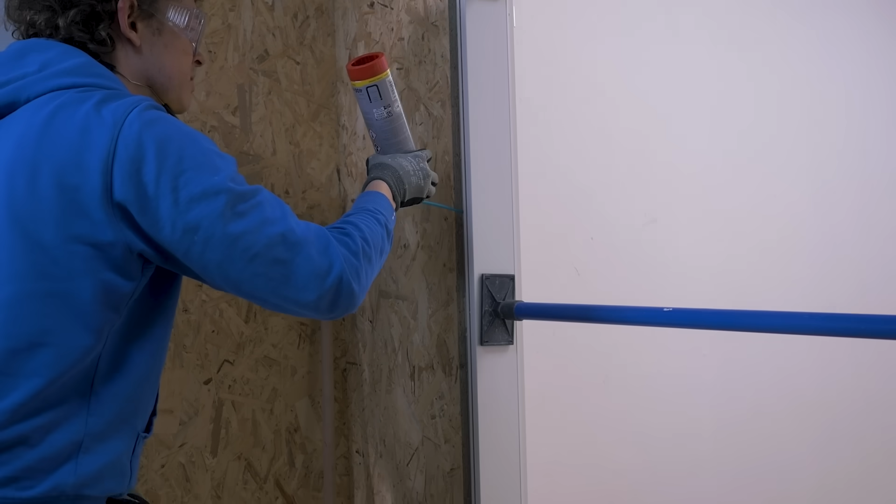New workshop renovation part 13. Last time we went into a bit of detail about installing Stefan's and Robin's door, improved our insulation cutting, and finished up the last walls, and then Robin's shop.

And with most of the heavy work now done, it's time for, as you can see from where I'm recording, lighting installation in the new workshop. Very important topic for me, since I'm not only working in here, I'm recording video in here. And I have additional requirements. I want it evenly bright everywhere and the same light temperature.

So what I'm going to be using are light panels, 21 of them. And I had an interesting idea for mounting them, kind of invisibly. I didn't quite like the way Stefan and Robin did it. They mounted them with a 3D printed clip in each corner, which means 4 well-aligned holes per panel, and you can't really adjust anything afterwards. Since I installed 21 panels, I didn't want to drill that many holes into the ceiling.

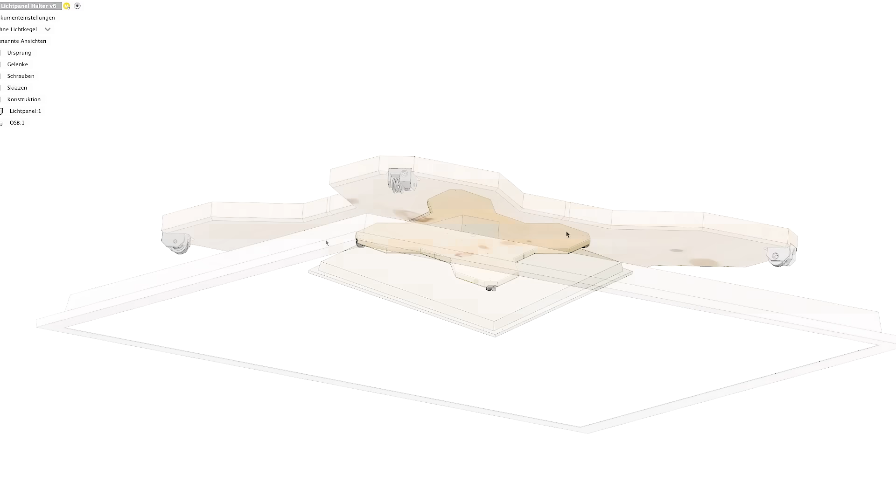So here's the design I came up with, and you can safely say it escalated. The idea basically was to have a backing plate behind every panel that houses all the components so they're organized and hidden away. That being the power supply and a little power distribution box. And then to hang the panel from the backing plate, I would have 4 pieces of rope attaching to each corner of the panel, which are adjustable in length, so I can adjust the height of the panel precisely.

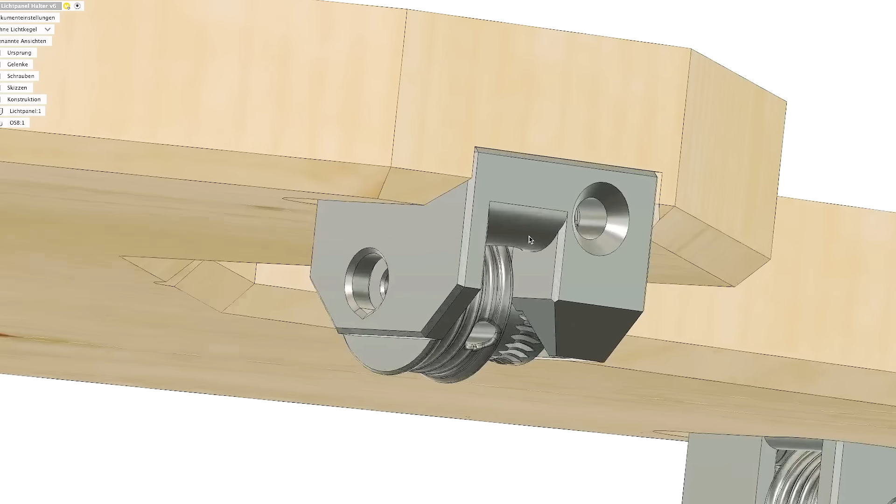And then I thought, why not make this rope attachment a 3D printed winch? Yeah. That's the design. What a stupid idea to make this 21 times, but without executing it, you never know if an idea is stupid, so let's get to work.

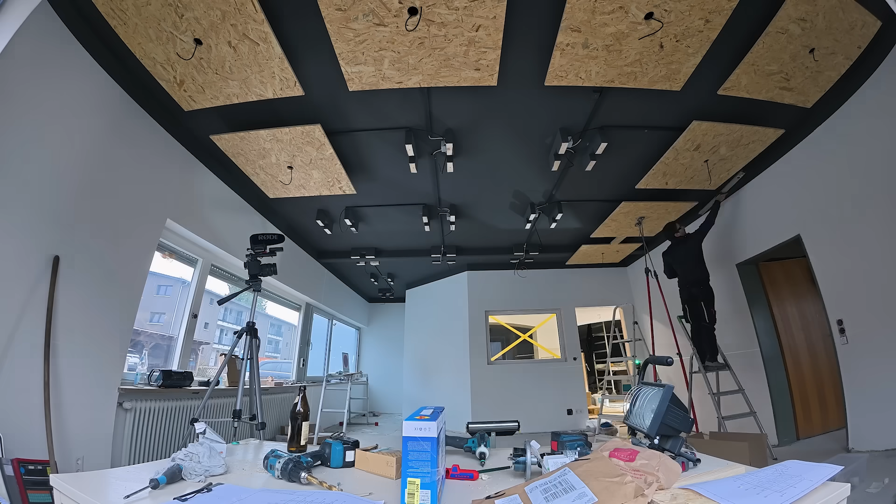The material for the OSB panels are actually offcuts from the office ceiling panels. I brought them all into the shop and cut them into roughly oversized squares. So many squares. Then at the CNC router, I only needed to position them roughly.

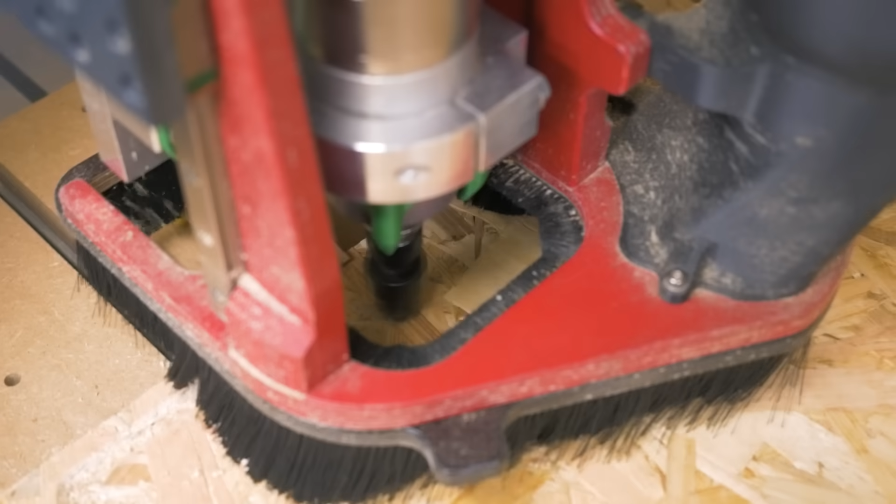The first pass is the chamfering, which will make sense in a minute, and spotting the holes for the power supply and breakout box. Tool change to cut the outer shape, and the little pockets for the winches.

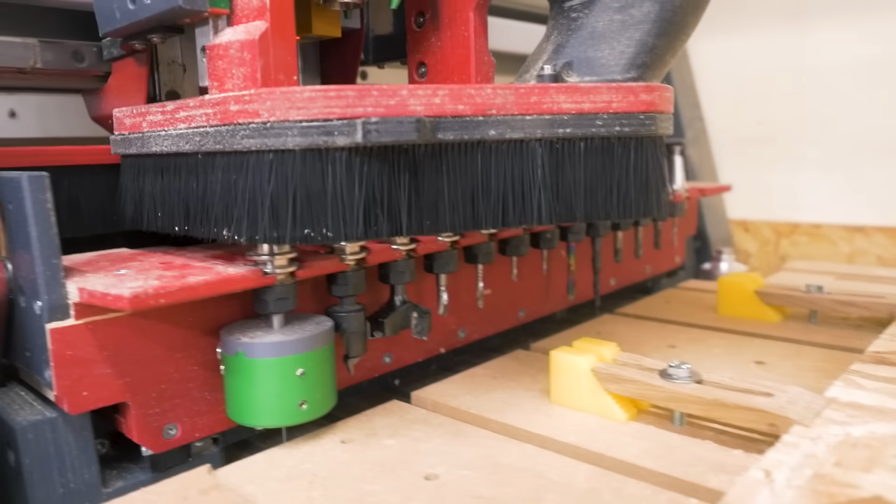Having the chamfer made first meant there's no tear out when cutting the outer shape, because all the little wood fibers are well supported. Once done, I could hammer off the waste and flush trim everything with this chamfer bit. And now, repeat.

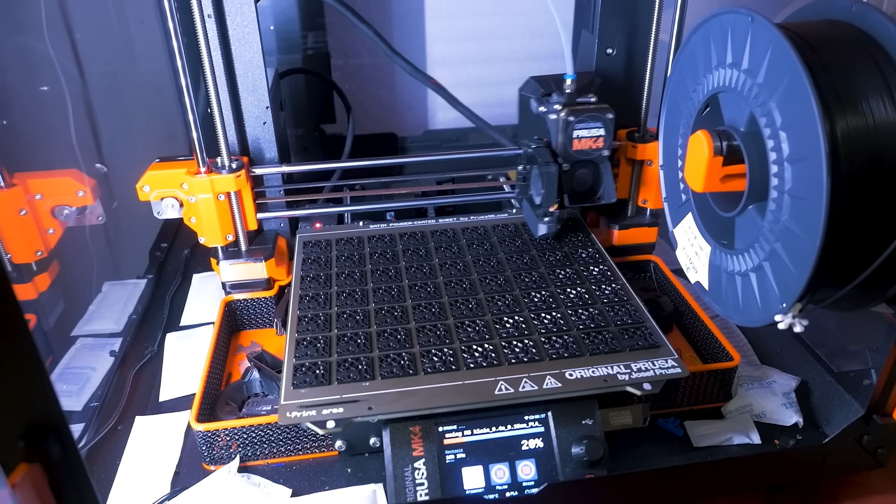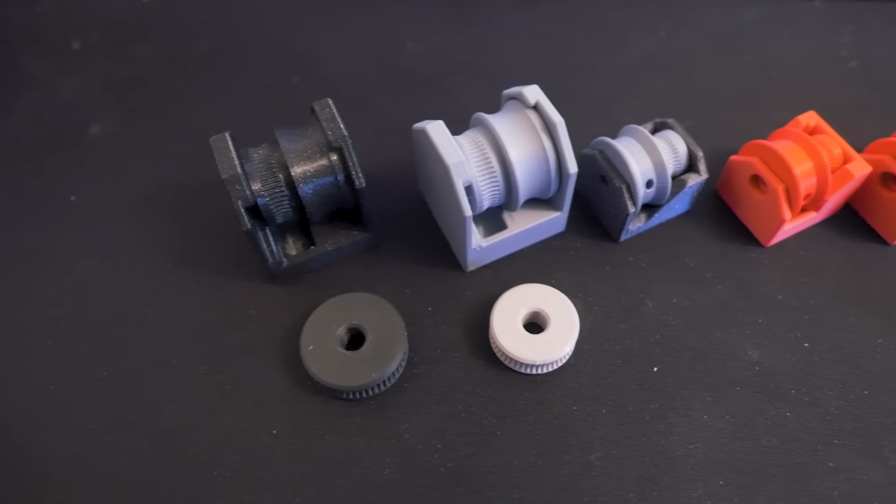In the meantime, the 3D printer was busy printing all the winches. But the final design took a few iterations to work every time and be easy to assemble. When you have to do it almost 100 times, every detail becomes important. Time for assembly.

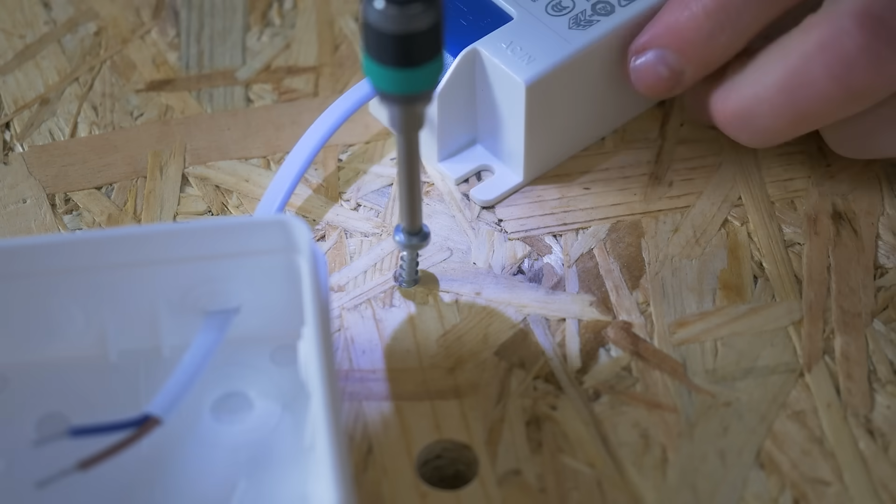Mounting the winch bodies. Then the breaker box and power supply. 21 times, of course.

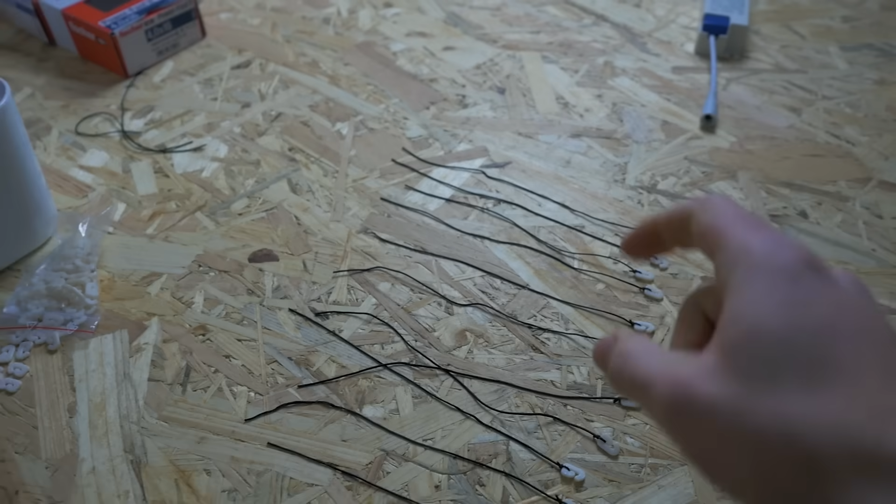Now for actually hanging the lights, I'm using a nylon rope with a little 3D printed hook. From the spool I can tie a simple knot, put a hook in the loop and pull it tight. This way the knot will pull itself tight under tension.

And then cut it with an electric lighter. This will seal the ends at the same time. Here again from my point of view in real time.

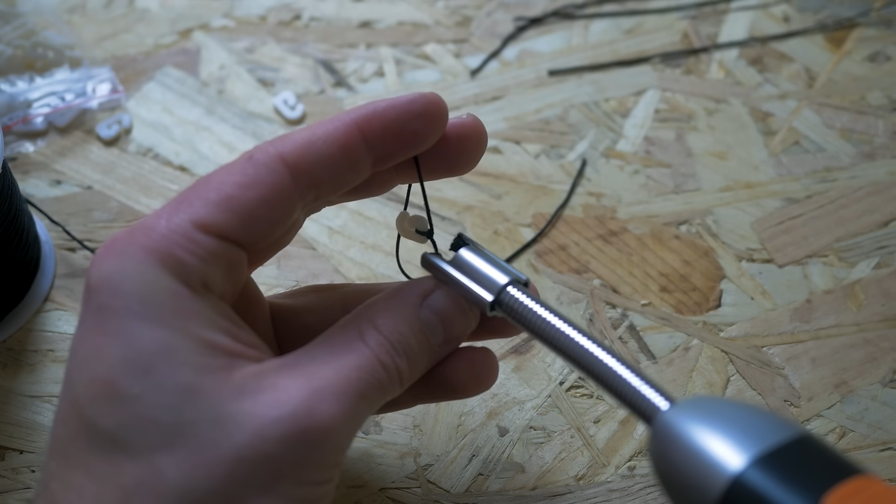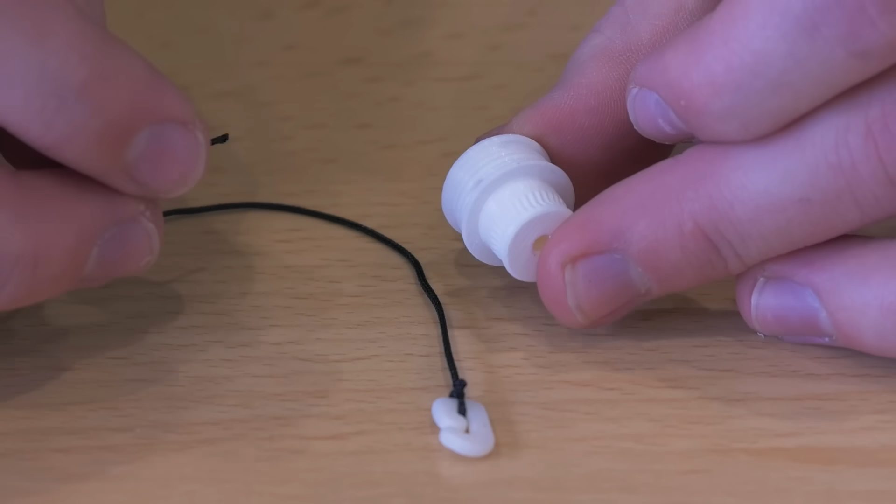So many hooks. Two screws in the table was a great jig for cutting to equal length. Now you can grab a spool and thread the cord through the little hole. Tie a knot at the end. And it's secure.

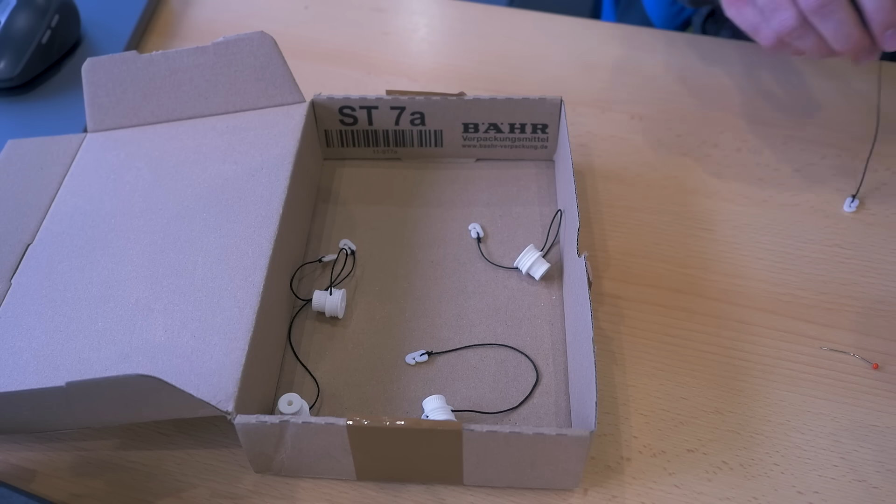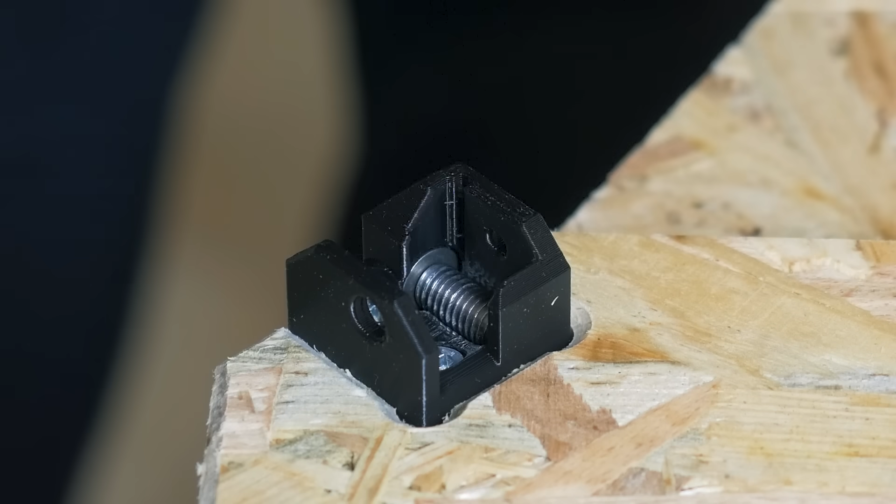Throwing them in a box was a fatal mistake, but future me will find out soon. In now go a washer and set screw with grease. Then the pulley and a little bolt where the bolt head is used as the axis on this end. It was going well for a while, but eventually all remaining pulleys tangled up into a big knot, which was great fun to take apart again.

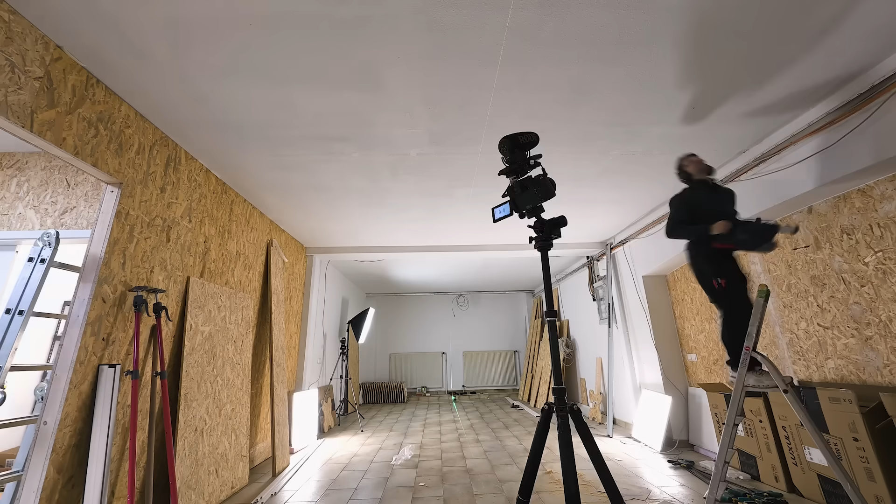Alright, next I need to mark the layout on the ceiling, and for that I made a drawing with all the dimensions. Everything uses this corner as reference, so I set up a crossline laser equidistant to the wall and marked the hole positions with a distance laser. And I had a great setup for some offset from the ceiling. I then only needed to drill one center hole for each panel. And with the oversized hole in the OSB, I had some front to back and rotation adjustability.

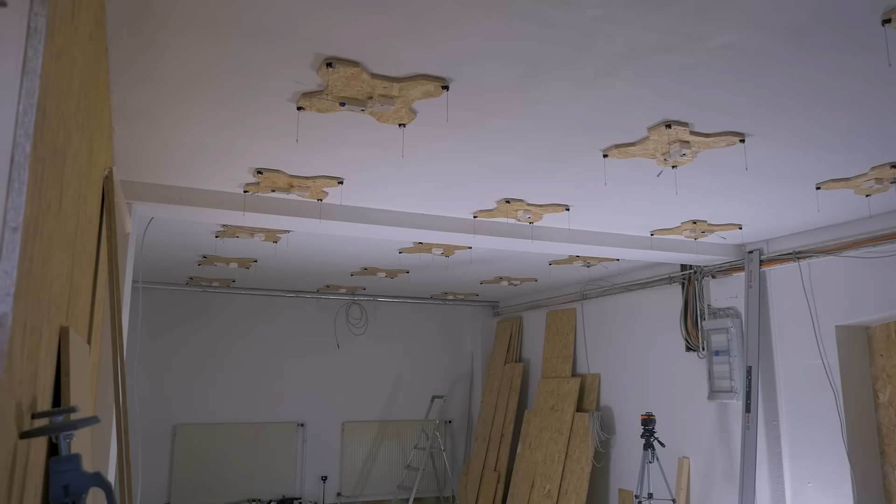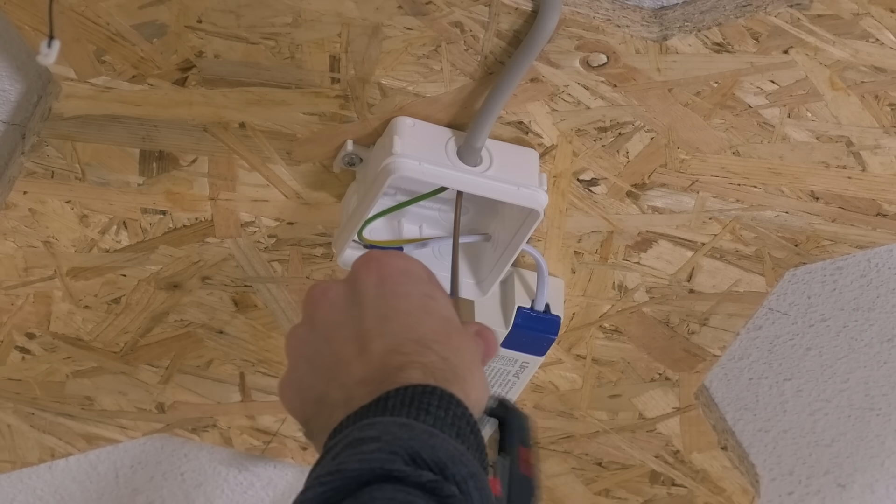That's done, now come cable channels for wiring. That was straightforward, as well as the wiring itself. It just took way longer than anticipated. In the non-branching panels, I could use these type of Wago clips, and in the branching ones, the quintuple ones.

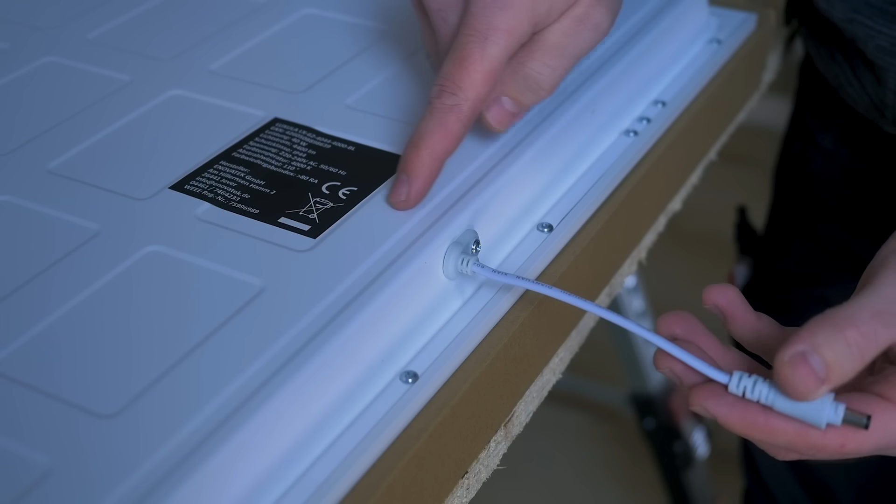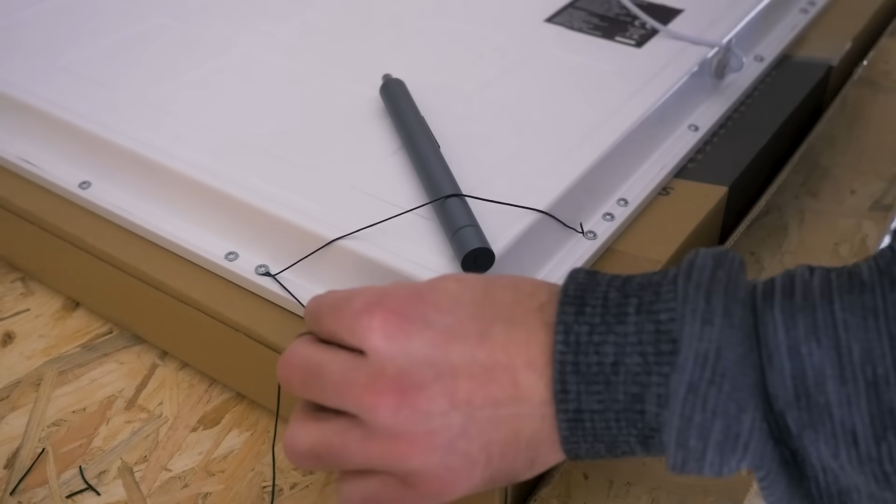Now the panels. Now the cables come out the side of the panel, but I need them to go up like this. So I 3D printed a little clip that hooks on here. Cable in here. Done. Unfortunately, the panels don't have an obvious mounting option, so mounting some more of the nylon cord. And these screws are perfect for that. Something in between, so there's still a little bit of slack. That looks good. And then cutting it off.

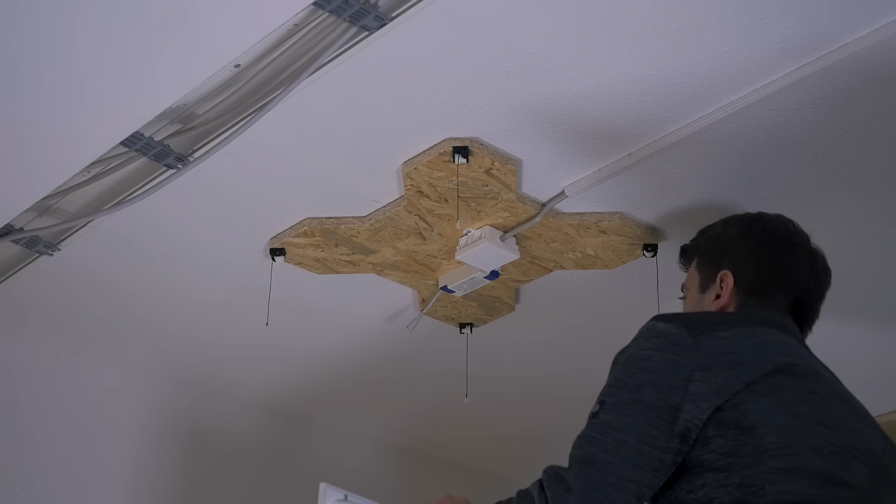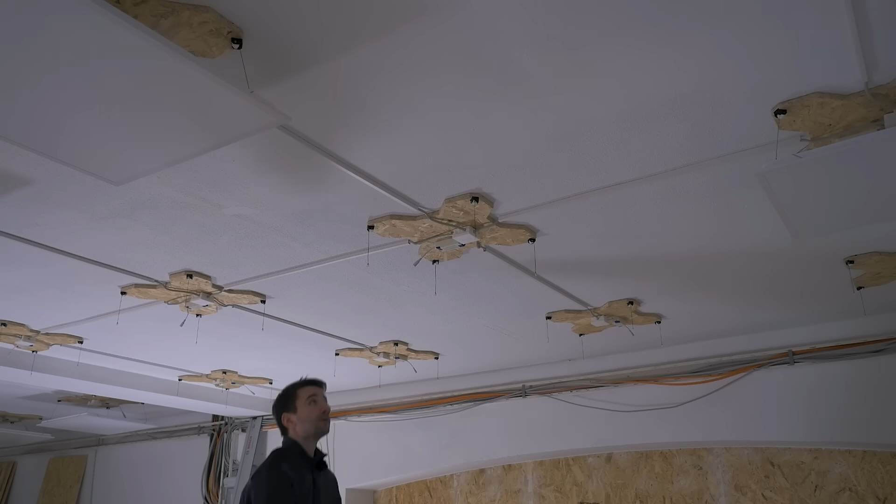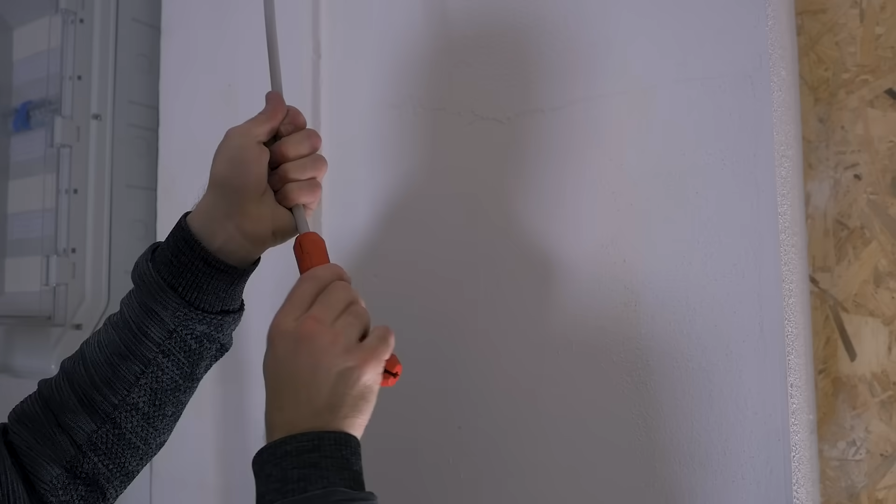Then up at the ceiling, just hook in the first two, plug in the cord, and hook in the other two. Done. Alright, now all panels are up, except the two with the light switch cable, and that's the last step before turning them on. Since it was already hooked up to the RCD, I couldn't just cut it, but had to splice it open and cut each wire individually.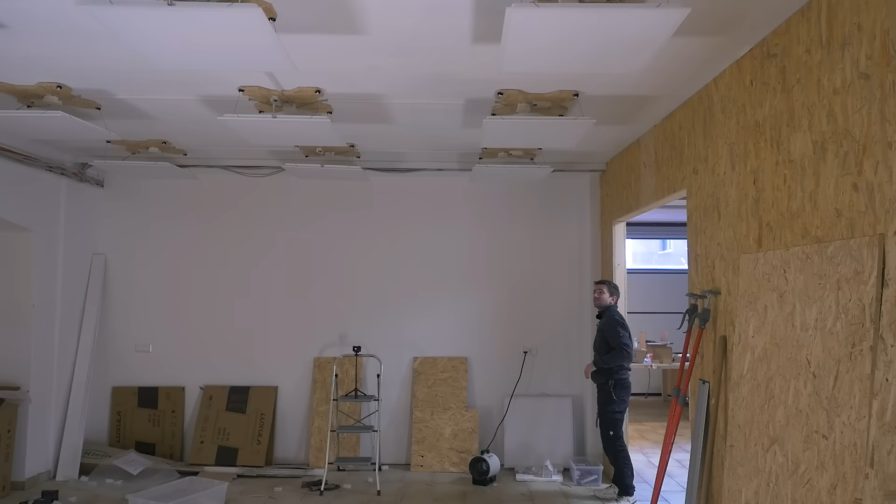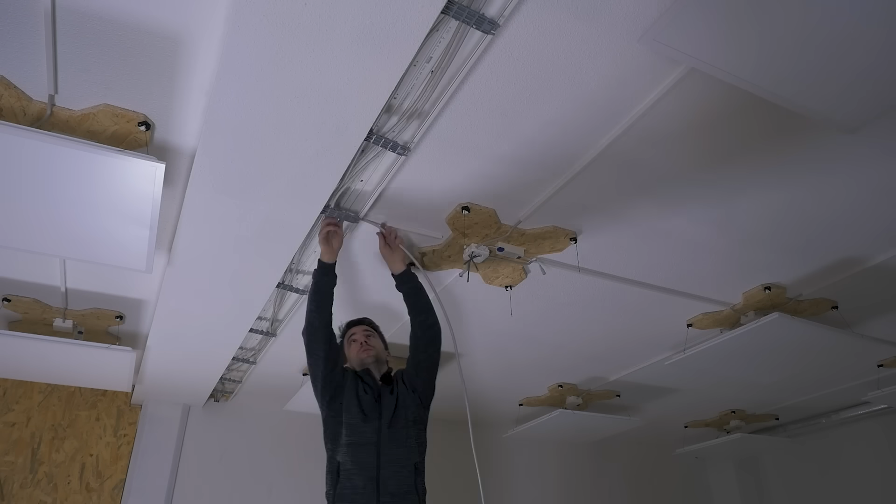Woohoo! Nice! Bright! Finally! What a difference! Just gotta do it again. Lights on. Yeah!

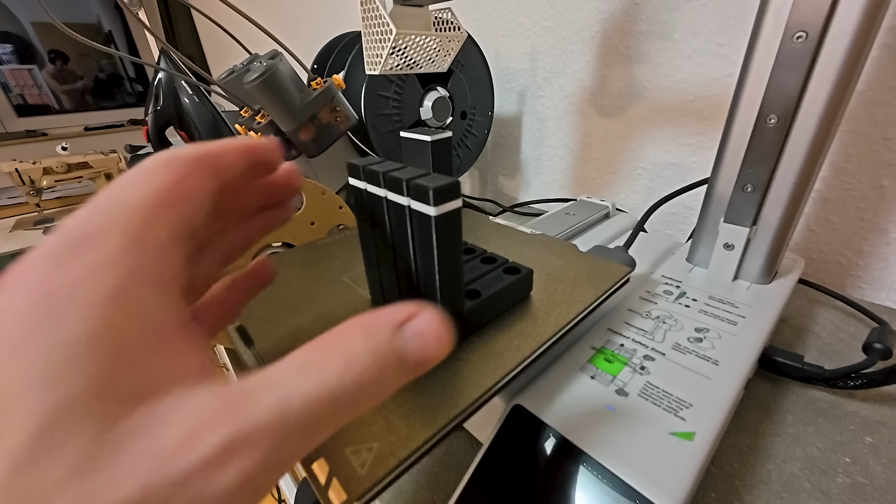Okay, and with it now nice and bright in here, I can adjust all of the panels to the same height. Right now they are all wonky and at random heights. For that I printed 4 little brackets that I could stick to each panel. Then I set up a laser line high up and could adjust each corner until the laser hit the white. And now everything is nice and neat.

But the question now is, was it worth all this effort and would I do it again like this? Yeah, well, I love the way it turned out, how clean it looks and how everything is nice and neatly aligned. But yeah, it was definitely more time consuming than Stefan's and Robin's installation. I think I wouldn't do it again like this.

But it was an excellent exercise and experience in terms of designing for mass production and optimizing the workflow for machining and saving time during assembly. Problem is, I just can't translate that in the video. It was just a nice experience for me. So yeah, now I know all that.

But what I also learned is a lighting installation like this is time consuming. Wow! Just the installation of all the parts, so marking the positions, drilling, electrical stuff and wiring and aligning the panels took about 1.5 days. I greatly underestimated how long that would take. Maybe it really takes that long or I'm slow, but I don't know, whatever. Now it's bright.